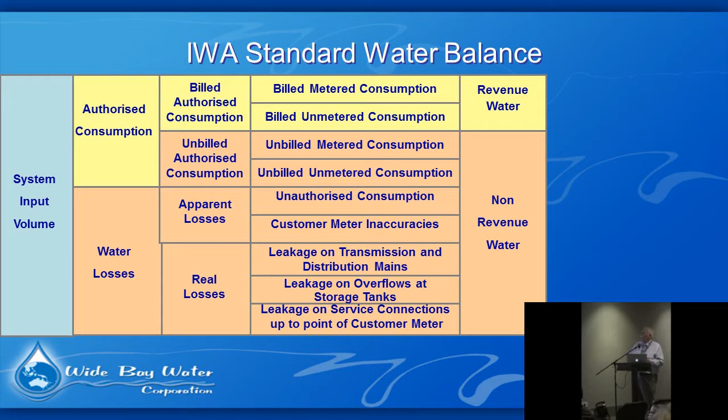Apparent losses, you can see how it fits in here with what David was talking about, the system input, when we do the IWA standard water balance. It's all about trying to find out what the non-revenue water really is and how that splits down. You can see apparent losses here moves on to be called unauthorised consumption and customer meter inaccuracies. It's actually more than that, and you'll see different diagrams. But what we're trying to do is split out apparent losses away from real losses and unbilled authorised consumption. We're trying to say there's other things as well as those.

There's another diagram you might see if you pick all the booklets up. Here we've got apparent losses, also called commercial losses to some people.

It splits down to 4 specific items. It's all the same really, because those 4 fit into the other 2 anyway, so it doesn't matter which sheet you pick up at what time, or even if you write your own, because there might be something specific to your area or your country that would fit in there.

What you've got to be very careful of is not having the cheat sheet that David talked about, that Ken used to do a lecture on. In fact, I think Ken should still do lectures on the cheat sheet, it was so good.

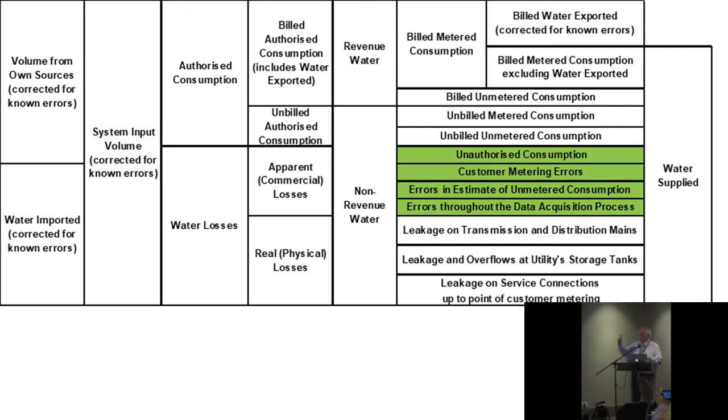People try and reduce the real losses, the physical losses, from a performance point of view or a reporting point of view, by subtracting as much as we can of it. Let's go out and find everything we can and put a stake and a claim in for it. And it's the wrong way to go about it. You need to be honest to yourself, if nothing else.

One of the issues we talked about, and David also talked about this a little bit, was unbilled authorised consumption, and he mentioned things like firefighting. In the presentation here that you're going to get a copy of, there's a list of other things that can go on. I'd say this side of the business is very much related to where cheat sheets can also come in. It's definitely related to unbilled authorised consumption and real losses.

So again, be careful. This is a guideline that's been put out recently in some software notes. But there's many others. This just gives you an idea, that's all.

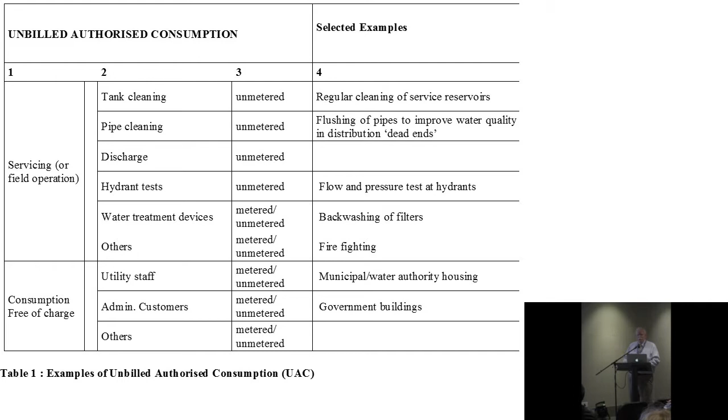One of the main causes for apparent losses is data transfer errors. People who are recording things, whether they're meter readers, whether the people in the accounts office, however your system is, there will be some errors. Even if you think it's all controlled by computers, controlled nice and well, there will be some errors. And these errors creep in to give you some wrong figures.

Estimated readings, very common. Lots of meters don't actually work when they're supposed to be. Part of an area might be out for some reason. They may not have actually metered some particular areas. So you introduce estimated readings. If you get this figure wrong, and you don't do your homework and test out some zones to see what they are, then this is going to badly influence what your real losses actually are.

Metering errors. I'm going to talk about meters generally in a minute or two. But meters, don't believe them. They tell you lies. Number one lesson is it gives you a number. Is it right? Generally it's not. It'll give you an indication that it might be right. I'll tell you why, but

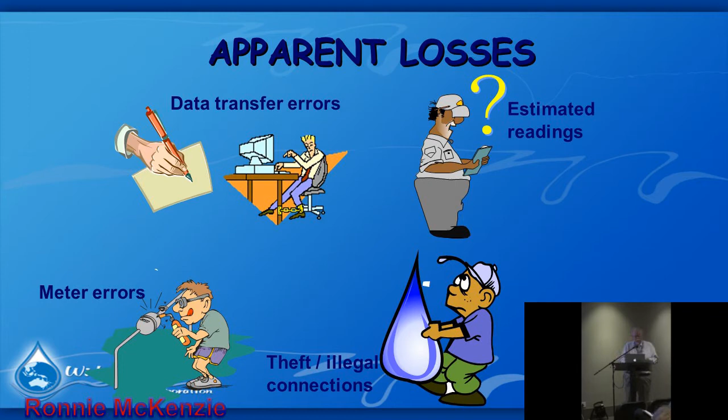I would say in a lot of the Pacific Islands, for instance, in Thailand, in Vietnam, places around Asia that I've worked, water losses through theft is enormously high. You're talking 30, 40, 50% of the water totally lost. So maybe I'm suggesting have a look at this afterwards somehow. It's very hard to find illegal ones, but you can do. You can do total checks on areas, and I'll give you some clues how to do it.

David also talked about the top-down accounting. You see, as well as finding your actual water losses for a good index, you also use this top-down approach and the bottom-up accounting approach for determining your apparent losses as well. And you do some sampling in areas. You can do smart metering. This can tell you an awful lot that you might be allowing as an estimate otherwise. And whatever system you do for working out your apparent losses, you should have an audit trail, a paper trail, a computer file to prove exactly how you've arrived at your particular figure.

Because an awkward CEO like me will not believe you if you just come up with a figure. I want to see how that's been audited, what proof there is, what testing have you been done. And people get to know that over a period of time. So you could well be the leaders, you could be the data gatherers, but wherever, you start a good system of keeping a log of everything you're doing to test out.

Now the top-down accounting for all water, like David talked about, is looking at the total water that's going into the system and then trying to break it down into its component groups. The bottom-up approach that David talked about as well is, as he said, looking at, first of all, night flows. Well, you might not have all the night flows to be able to look at, but you might be able to have some areas where you can get that information, and it's just not as hard as most people think to actually gather. But again, that can be misleading.

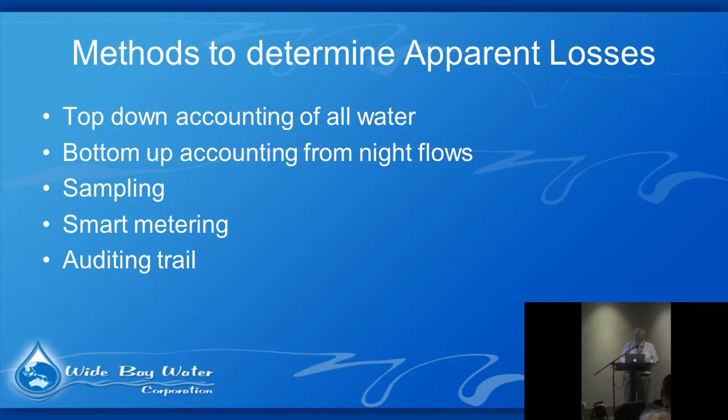So one of the things you can do on water meter errors, or I should say one of the things I did at least, was for every 15,000 properties, I'd want 150 meters actually tested on site. Just to see, every year I'd want this, just to see how they are actually measuring at 2 different flow rates, a high flow rate and a low flow rate. How accurate are these meters? I used to take the meters out and send them away to be tested in a laboratory on a workbench, but we found that a lot of the meters actually got damaged whilst they were being taken out, being transported, and we were not getting the right information.

So we set up simple systems to fill up known volumes of tanks at 2 different flow rates, low flow rate and a fast flow rate, to see what actually went through the meter when we knew the volume of the tank it was filling.

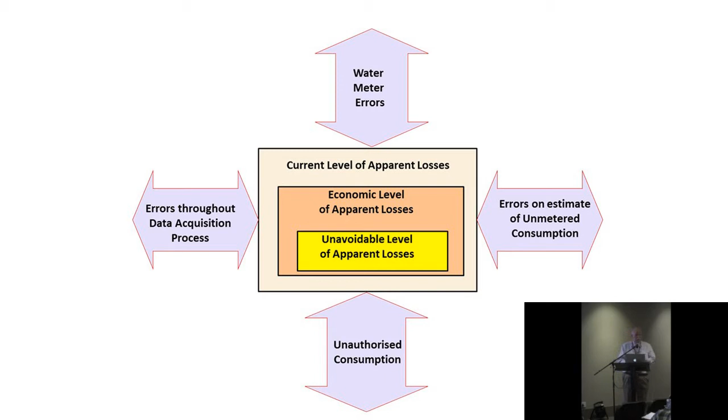Now unauthorised consumption is one of the most awkward ones - the theft of water, taking water when they're not supposed to, maybe drought restrictions are on, etc. Again, smart metering helps, but I'll also talk this afternoon about district metering and step testing, and show you how you can find illegal connections. People who put illegal connections on are often smart - they don't want you to see it, so they'll put it somewhere not easily seen. Unless so many people are stealing water in an area that they just stop bothering and put it on an open main. I know that goes on in lots of countries.

Now there's a group that's been working on apparent losses, and like David was talking about for the ILI - an index of water losses - there's been a group trying to work out an apparent loss index. My advice is you've got bigger problems perhaps than worrying about comparing yourself with other companies on apparent losses. What this group decided is that in a well-managed utility that's on top of most problems, metering loss may be reduced to about 4% of authorised metered consumption, and unauthorised consumption would be less than 1% - that's in extremely well-managed companies. Using that information, they say there's a reference apparent loss of 5% overall, so they're using that as a ratio now. I'd say this isn't general throughout the world - there are just some trials being done to see whether it's worthwhile.

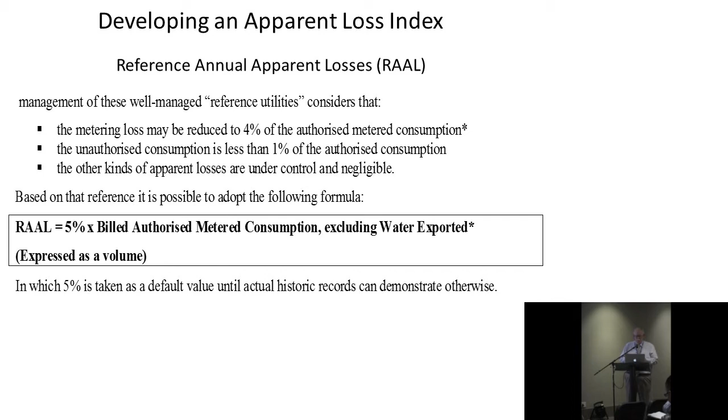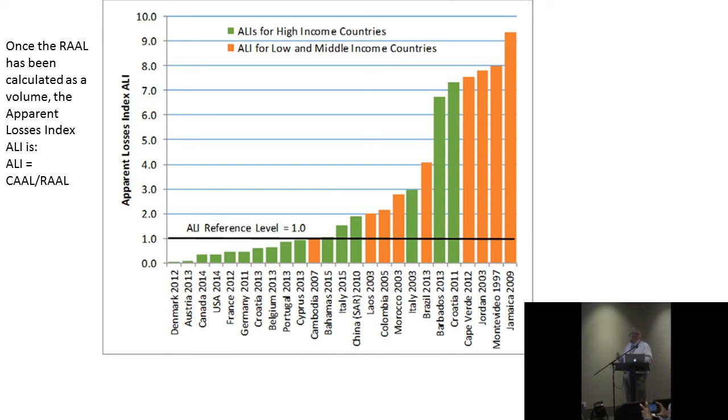And although it says what countries these are from, these are really individual companies within those countries. So the graph that's been put out is a bit misleading, I believe, trying to get to a ratio of 1. It really shows that a lot of high-income countries can be relatively low, but a few will still be high, and the ones that are high are the ones that don't actually go out doing any audits - that's what's been found out. I think you've probably got bigger issues than comparing yourself, but nevertheless it's something that's there that can be used.

The reason I don't really advise you to do it at the moment is something like what David was talking about - pressure. You can demotivate people from doing things, and that's why I wouldn't worry about this aspect at the moment. I don't want you demotivated. I want you to go out and try to find everything you can about your particular system.

All right, we'll talk about meters for a bit, and the types of meters used in water distribution systems. These are the general ones - there are others. Semi-positive displacement meters are really a small mechanical meter with a space inside that fills up and empties out as the water's going into it. It works very quickly - it's a known accurate compartment that fills up. So its reading has been relatively accurate for the last 40 to 50 years they've been using these. The design's been altered a lot in that time, but nevertheless it's a type of domestic water meter that's been used commonly for years and years.

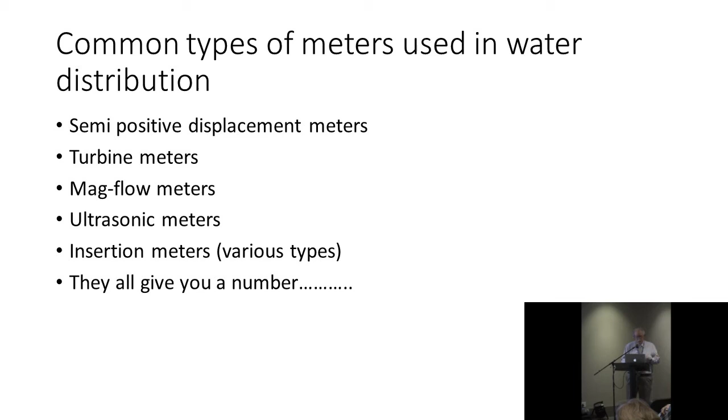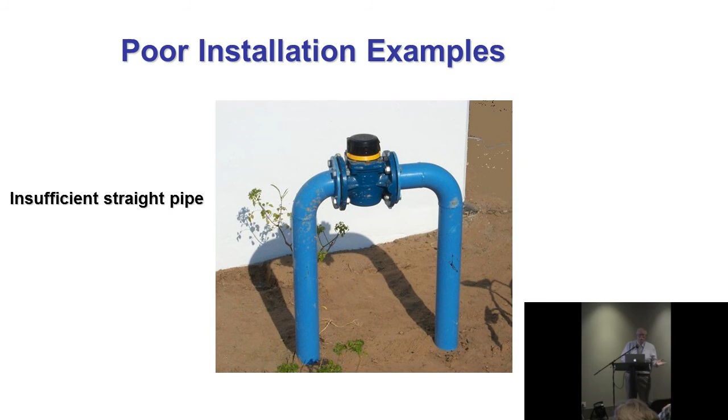Okay, these are a poor example of how to install a meter. Not sure where it is - I think it might be Australia. But it's put immediately after bends, and when water hits a bend, it starts turning one way or the other. This particular meter is a turbine meter, so it's going to be affected by how it spins round according to the vortex and how the water's swirling through. So the worst thing you can do is put a meter straight after a bend, because you'll either speed it up or slow it down and it won't be accurate.

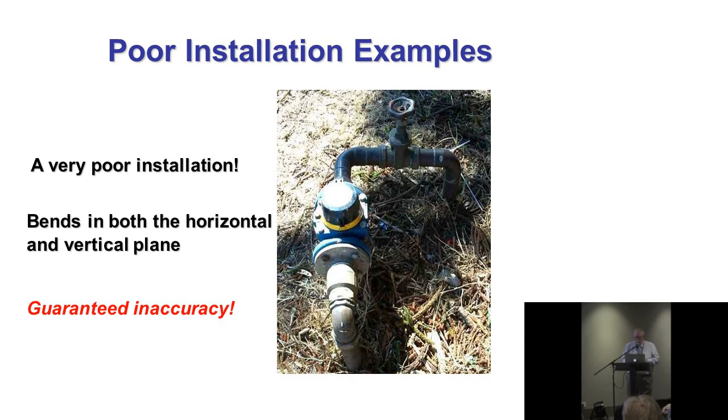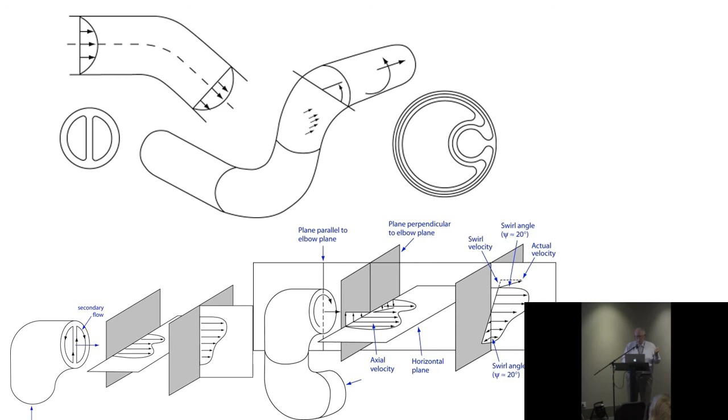I've just been chairing a commission in Queensland for non-urban water, for irrigation water, and I was quite surprised when I came across things like this. They've learnt on the irrigation system - they've got standards for lengths of pipe, and they've gone far beyond what people normally do in putting straight pipe in. But they're out in the rural area, they've got plenty of land, so they can put it above ground.

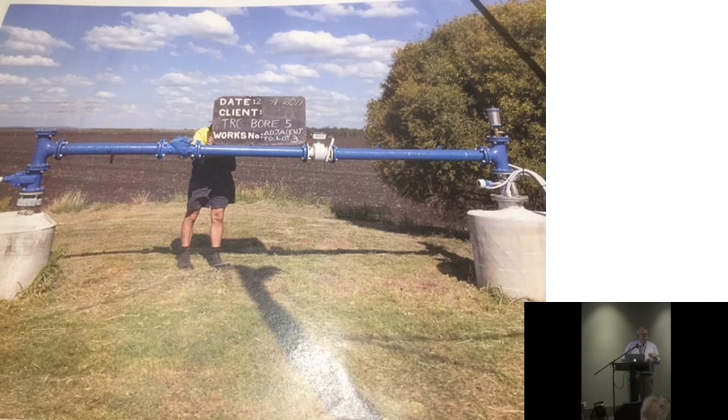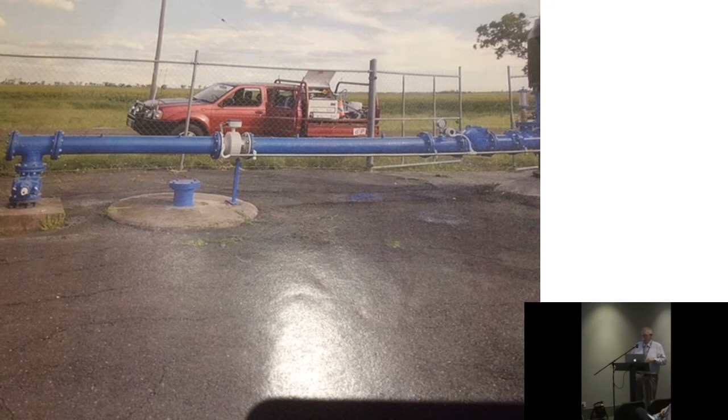Look at all these, I was fascinated - the massive lengths of straight pipe just to make sure they're trying to get a correct reading. The government insists on this, and unfortunately they've got this system of certifying that a meter is working correctly and testing it, but nobody ever bothers to test the meter itself. They make sure the pipe works right, and then they just say it's working, it's okay. Whereas I found 90% of them not working correctly.

All right, just a quick talk - I'm under pressure here from somebody sat on a seat in front of me, so I'll just...

We did a trial for Australia 7-8 years ago now, on automatic meter reading. Basically, I persuaded the Prime Minister that he needed to do a trial in Australia because all my meters needed replacing. And I thought, well, if I persuade him to do this trial, he'll pay for all the meters, and that's exactly what happened. It cost him about 20 million, which was great.

I've been looking at smart metering for 40 years. I thought this is the answer to a lot of our problems. Every 5 years I kept going back to look at what's available. When I had the possibility of getting all this money off the Prime Minister, I looked a bit harder, and there was some good stuff coming out in America. It's blossomed since - it's absolutely wonderful now.

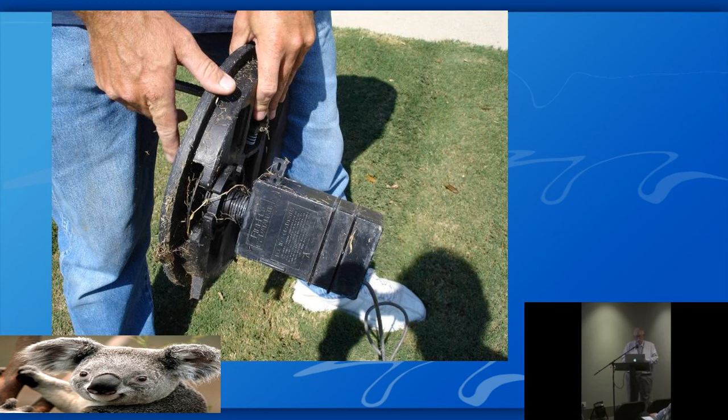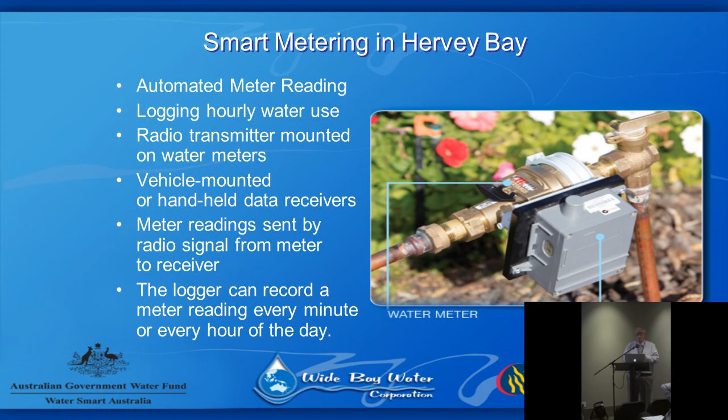But the ones we got just fit on the side of either an existing meter or a new meter, wherever you want, and the logger could record whatever you want it to. So I got them to record every hour - I wanted to know every hour.

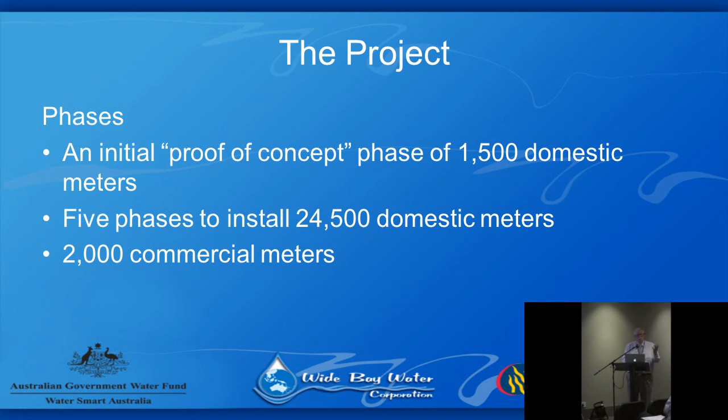We started just to prove that everything was going to work all right with 1,500 of them, and we moved to 24,500 of them, then 2,000 on commercial. It went so much smoother than what I thought it would do. The potential benefit was absolutely enormous.

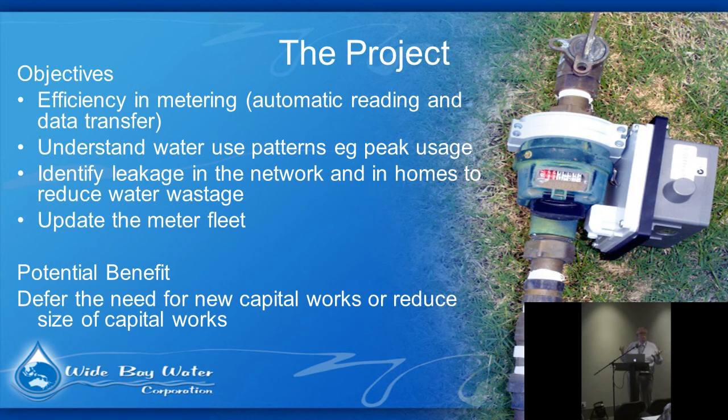I wanted to defer capital - being a CEO, you don't want to spend as much or more than what you have to. So a big issue to me was not just measuring water, but the information it would give you. If I could get information to prove that we should give incentives to people to take water at a different time of day, I wouldn't have to lay trunk mains to meet peak hour demand.

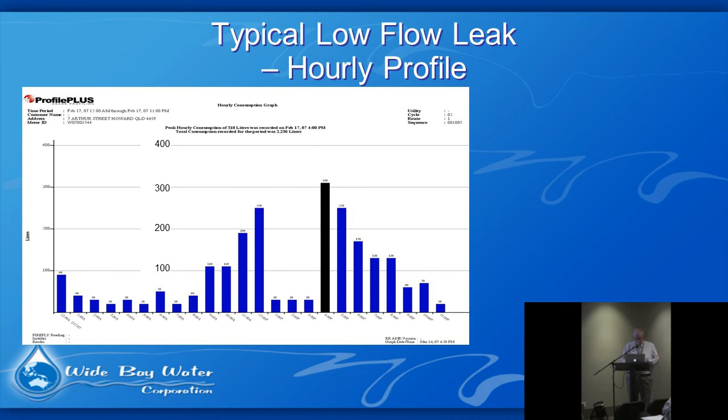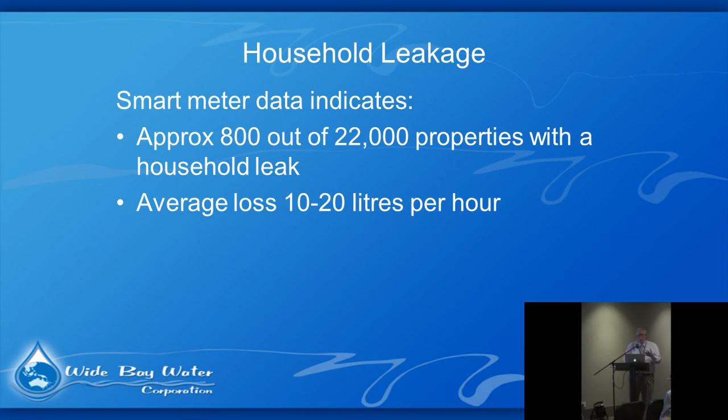I might be able to talk more on this afterwards, but out of the 22,000 properties that we started with, approximately 800 of them had a leak. Now, before we put these in, I sent all the wonderful leak detector men round, listening on every service for a leak, and they found lots and repaired them. There was 800 that they didn't find. And these are good men - they're not poor workers, they're dedicated, very motivated, they want to do a great job. There was 800 that they didn't find, and the average loss was 10 to 20 litres an hour on those. It made a massive difference to how we started viewing things like apparent losses, or what we allowed for nighttime flows.

Because when you look at district meters or water main flows, nighttime flows, you've got to make an allowance for what people use at night. We actually proved in these cases what they were doing.

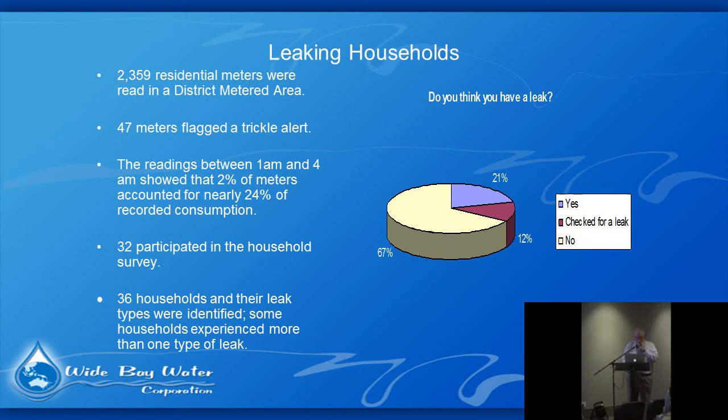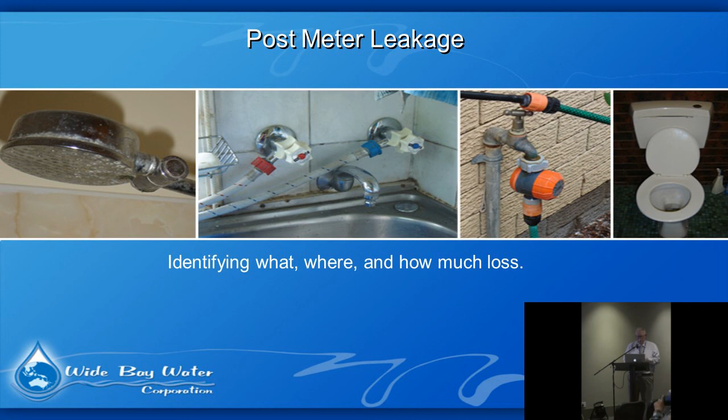Now in Australia we had a drought on, not quite as bad as what you've got here, just after I'd put all these in. And when I found all these leaks, I had to say to my staff, don't tell anybody, because I want to see what happens to these leaks over a period of time. I'll rush with this a little bit. The leaks actually came from lots of different things: plumbing, underground pipes, toilets, etc. But there you are, the vast majority were toilets, some even hot water systems.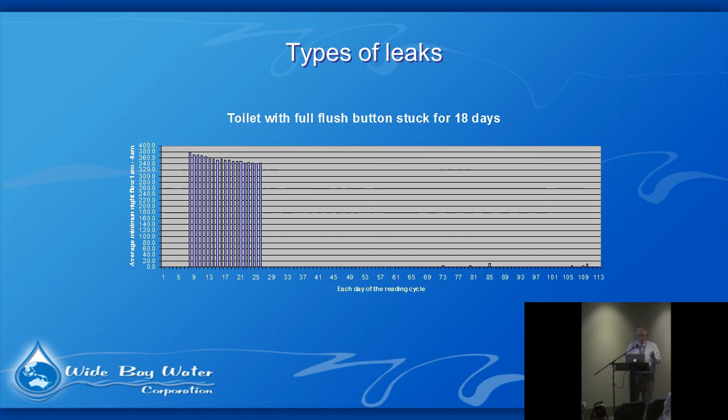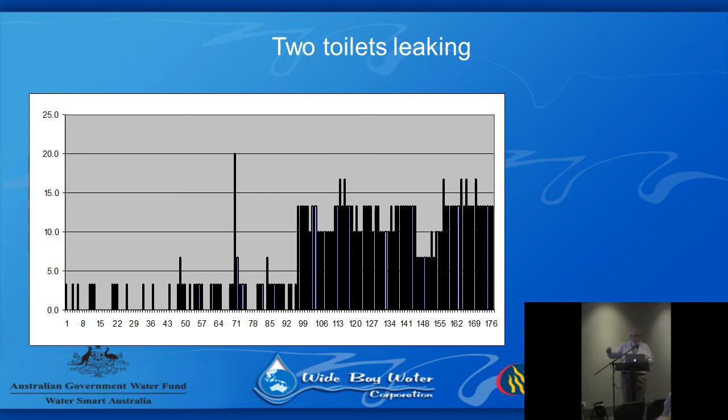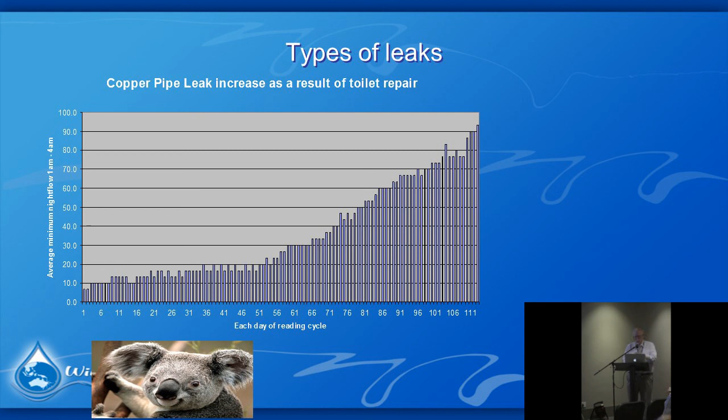And this is what I wanted to find. I wanted to monitor every day what the graph would show me, and then send a plumber in after a while to find out what the leak was. So our meter people, whenever they got a leak showing up, could see what sort of graph it's giving, and we could tell the customer not just that they've got a leak, but exactly what the leak is - whether it's on a tap, whether it's a toilet, whether it's an underground copper pipe, whether it's an underground plastic pipe. I got all these shapes developed, and this was one pipe that kept breaking every time it had been repaired.

Gathering data and information about not just apparent losses, which is what drove us on this, but getting better information to make management decisions, to find out really how much the real losses are by finding out what the apparent losses are and what it breaks down to. It's also extremely good during a drought condition, because this particular graph looks at about 140 meters in one particular area - that's domestic meters.

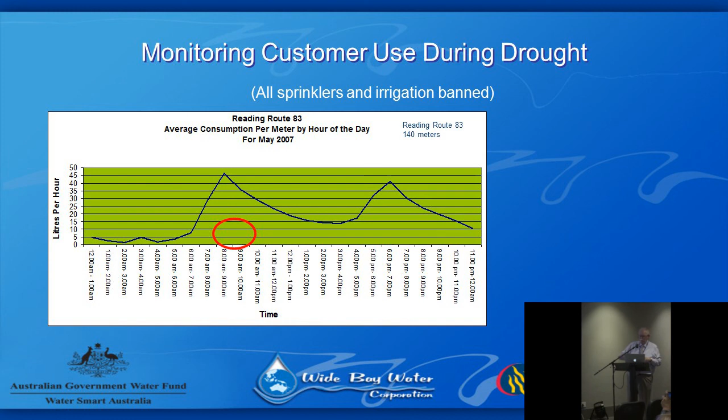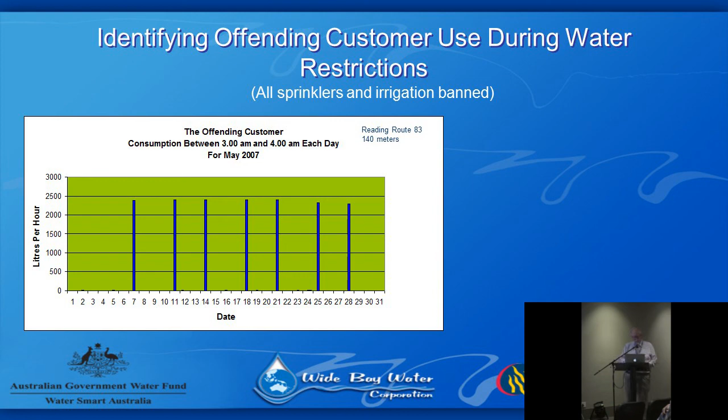And we noticed a blip at night time there. We went into all the meters within that area, and we found an offending customer who was watering his lawns in the middle of the night. You can see here when we looked at that one meter, between 3 AM and 4 AM each day, a massive amount of water going through. And we thought he's either filling swimming pools or watering grass, when it was illegal to, because we're in a massive drought. So again, smart metering can help give you other information as well.

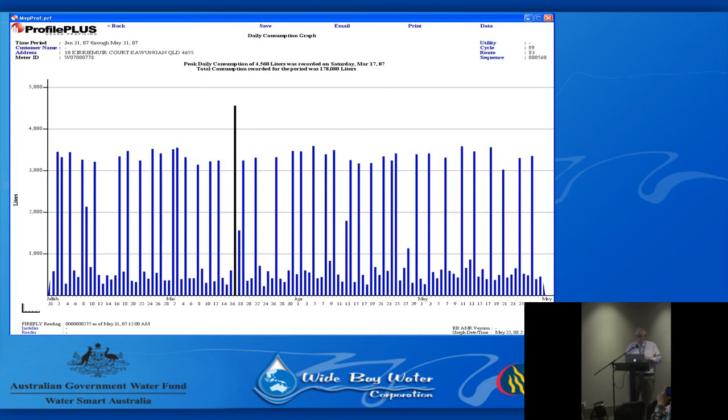And that's a similar situation. But I think I'm running out of time, so I'll come back to these.